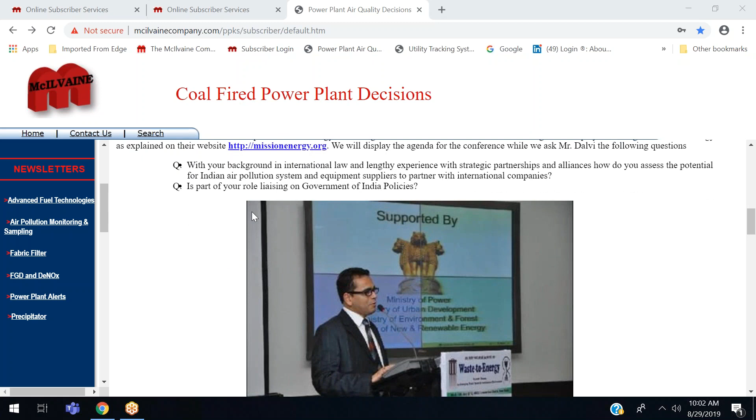I was just starting the introduction. I'm going to go to the answers to your questions in a minute, but you'll be the second speaker after Jerry Hunt. Okay, perfect. For the others on the line, this is Mr. Dalvi's picture here, and these are the questions that we're going to ask him.

Then we're going to be talking to Ravi Krishnan of Krishnan Associates about the Indian market. He was delayed—he was in Malaysia, trying to get back to his Mumbai office, but he may or may not be able to communicate because he may be on an airplane. In that case, I'm going to go through some of the market numbers for the Indian market. Joe Wang is on the conference with us, and he's a fountain of information about dry scrubbing—they are the largest dry scrubber manufacturer worldwide.

John Kirsch of NACE is going to summarize the program—a very impressive program they've undertaken to improve all the operations of their dry scrubbers at several different plants. Scott Affoldt will be making a presentation about predictive analytics tailored to dry scrubbing systems, which I think will be quite useful.

The consultants at Burns & McDonnell have provided some talking points, and we'll be pulling those up as well and discussing them. The Indian valve manufacturers are confident that they have all the valves to supply the Sox-NOx market in India—is there anybody from that group on the phone with us here?

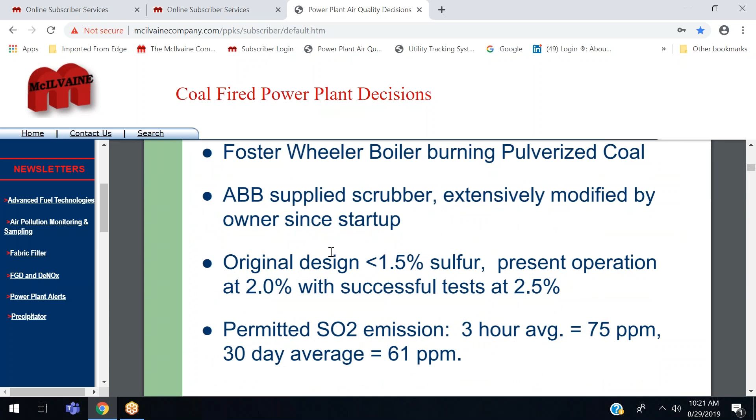Each of the days is going to have this quality of information to it, and in this particular case—I don't know if you can hear me, this is Paul Brandt with Burns McDonnell. I can speak a little bit, if John's not available, about some of his presentations and what they've looked at, just from a high level, that's maybe worth touching on for a minute.

Nobody achieves that, at least not in dry scrubbing. So whatever you are above that is costing you money on the reagent. I know they've continued to work through that.

They have employed dew point monitoring. One of the key parameters is your outlet temperature from your scrubber. Obviously, the lower you go, the better your reagent usage, but you don't want to go too low or you'll get into the corrosion realm downstream, which is something else John and his team have worked through in past discussions and presentations—really chasing, finding good materials, and finding that balance between improving your reagent utilization, using a dew point monitor to set your approach temperature above saturation, but not going too low and then creating a corrosion problem. I know Jerry can speak to that.

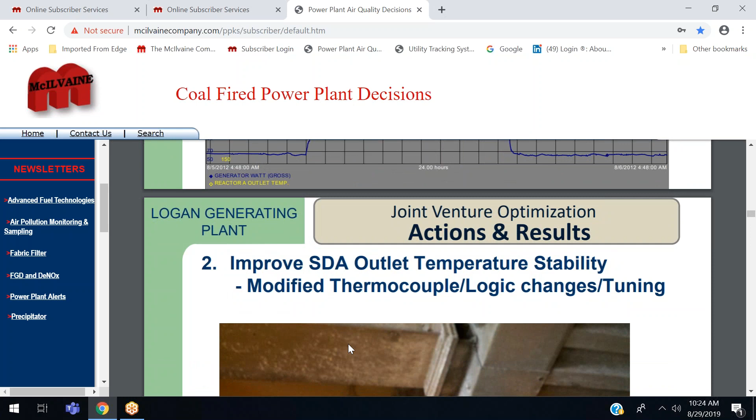I think they've also looked at different bags in their bag house—that may be later in the presentation. But yeah, those are two that John's really worked hard on with his team: the corrosion and the reagent utilization. So we definitely want to hear more about the bags too, and maybe we can learn a bit more about that for the meeting we could schedule next week on the bags and so forth.

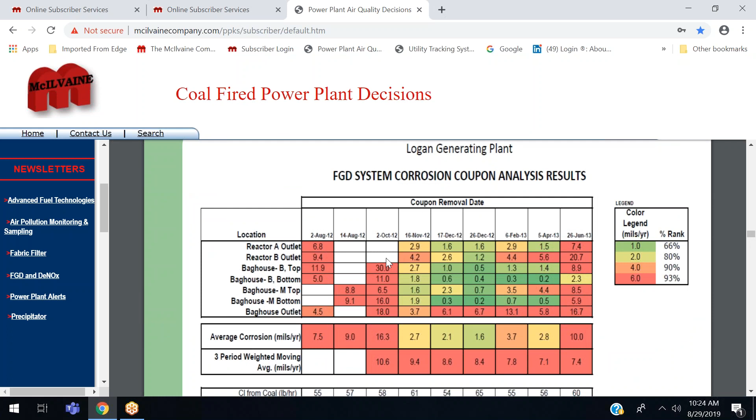But here, this presentation, by the way, is going to be available. I'll just ask one last query as to whether—Ross, would you have been able to unmute John there? I unmuted everybody, so anybody who was on should have been able to talk. So, oh okay, I guess maybe John was on earlier and we lost him somewhere along the way. I don't see him in the list of current attendees. Oh okay, no. So anyway, we appreciate his activity there. I think what we'll do then is move on.

I think, Mr. Dalvi, the best thing is to pull up the written answers that you provided, and then just have you verbalize with that in the background. How's that? Sounds good. In fact, I would like to answer them. If you can pull up, Bob, the program agenda which I sent this morning with the Sox-NOx conference.

A bit about Mission Energy Foundation. We are a non-profit organization, a group formed almost a decade back, 10 years back, by our Director General, Mr. Ashwin Kumar Khatri, under the aegis and blessings of the former President of India, Dr. APJ Abdul Kalam, also a renowned scientist, one of our beloved leaders here in India. So with Dr.

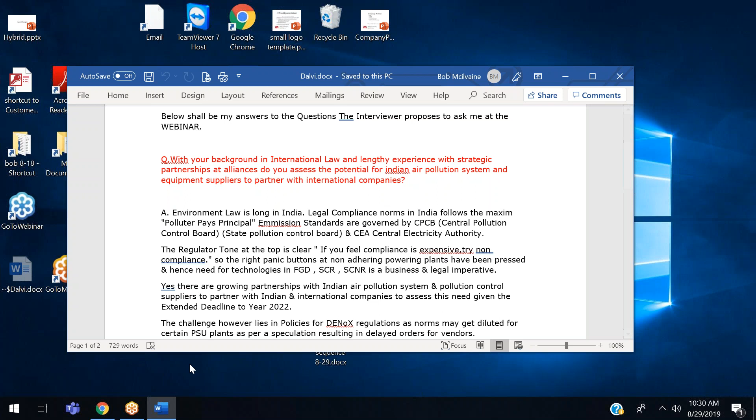Yes, Bob. And so as part of your role, liaisoning with government of India policies. Hey, Bob. Well, Bob, yes. Yes, please. Hello. Hey, Bob. Yes, Bob, I can hear you. Hi, Ravi. Please tell me.

I have a flight to board in about 20-25 minutes. I was just trying to see if I could finish part of my section, and maybe if you want me to jump in next week, I could do that. But I won't be able to share screens. I just wanted to see if I'm needed today, or I should try. No, why don't we just interrupt for a few minutes here, and please proceed. Okay, yes, Ravi, please.

Okay, great. So I just wanted to take the opportunity to introduce myself and give you a little background, and then hit on some highlights on the scrubber market, the FGD market in India. My name is Ravi Krishnan. I've been in the air pollution control business for about 20 plus years, primarily operating out of the United States, and have been involved in NOx and SOx projects, having worked on several of them.

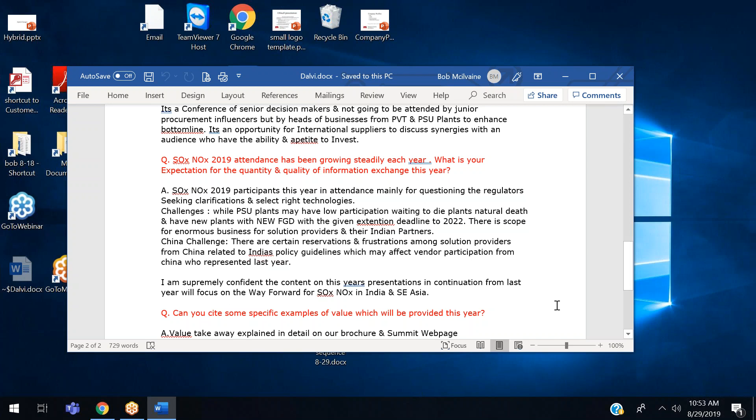So the value takeaway is explained in detail on a brochure and summit webpage. Of course, the link will be shared to all participants, which is Sox-NOx 2019.missionenergy.org. The second key value takeaway is the Government of India support from various ministries, which means the regulators would be present.

So I'm sure they'd be open to asking questions why the deadline has been extended to 2022, and what would be the effect, and what are the kind of compliances that they'd like to see.

We have Environment Excellence Awards in 10 categories, again explained on the brochure. The fourth, which is very close to my heart, is one-on-one meetings.

So this is not typically just a buyer and seller meet, but a policy conference. That's the reason why thermal power plants are expected to attend in large numbers, and we have such a great bit of contribution from the largest thermal power plant, that is NTPC in India.

And so these one-on-one meetings with sponsors and exhibitors at the exhibits with key participants during the day, and networking cocktails at the end of day one, is one of the key values. The post-conference report, this is what we with pride boast about, that Mission Energy Foundation.

Let me also bring in the second question. Is part of your role liaising with Government of India policies?

So here I would like to put the fact that we would be submitting a post-event report to varied ministries as a collective voice of the industry.

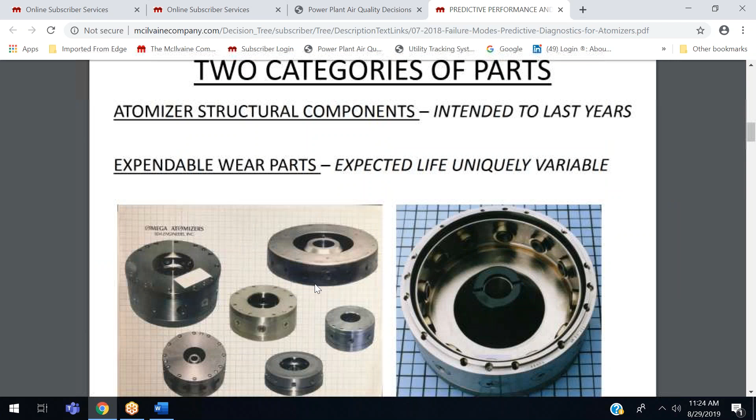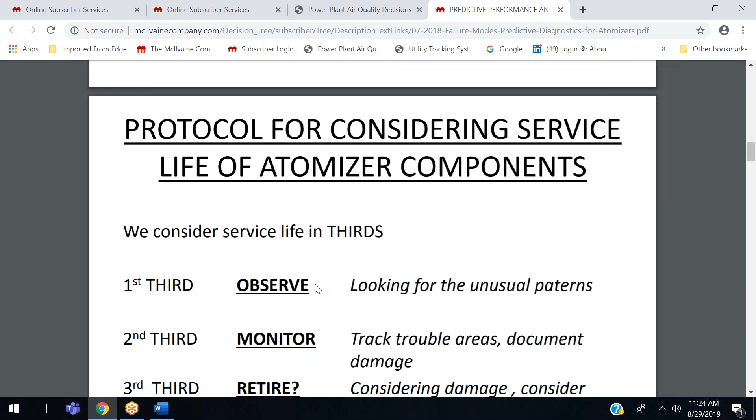But I do think they have done prognostics on a manual basis for atomizers. I think that leads us into Scott's paper, does it not, Scott? Because here's somebody with all sorts of problems with atomizers, and it has to be organized in such a way to lower the total cost of ownership. I think that's a good segue into Scott Alfeld's presentation.

Definitely. So, Bob, why don't you cue up the PowerPoint there, and I'll jump in. While we're getting that up, I'm going to talk a little bit about the opportunities for applying predictive analytics to air pollution control equipment. Predictive analytics have been used in a lot of rotating equipment for many years, things like turbines and what have you. But what I see happening in the future is applying some of these same predictive analytics solutions to air pollution control, both equipment and processes.

So Bob, go to the next slide. A little bit about Exemplar Energy. Myself and my business partner, Deepak Ajuria, represent Exemplar. We do some consulting. As far as technology liaison, a lot of discussion on India - we've done a lot of work in that market, specifically by liaisoning with Western technology companies to find local partners or technology transfer partners within India. It's a big growing market for pollution control technology, but it's important to have a local partner, and in many cases a local manufacturing capability, or else you'll never be able to compete with the prices. So we work with a lot of Western companies and find them local partners through licensing or technology transfer arrangements. That's a little relevant to some of the earlier discussion.

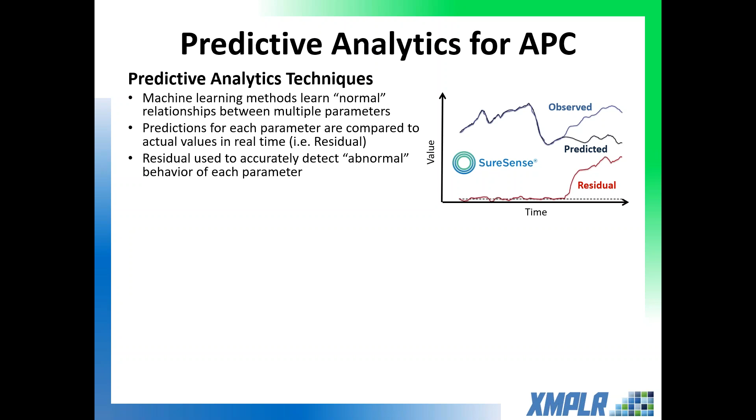Bob, click one more time while I'm talking. Predictive analytics for pollution control is really around using machine learning methods where we can learn the normal relationships between multiple parameters in the process or equipment, and then make predictions on what each of those parameters should be if that equipment or process is operating normally, and compare that to the actual values in real time. The difference between that observed value and the predicted value is called a residual, and that residual should be zero - it should have normal predictive properties. We can use that residual to very accurately detect any abnormal behavior in each of these parameters. Next click, Bob. The benefits for using predictive analytics for APC equipment really center around two areas.

The first area is around equipment reliability. There's a lot of equipment involved in the APC process, and these predictive analytics methods can detect very early on any pending equipment issues. The earlier we detect them, we can identify the cause, provide insights into the time to act, and correct the problem before there's any threshold impact on performance or a compliance violation.

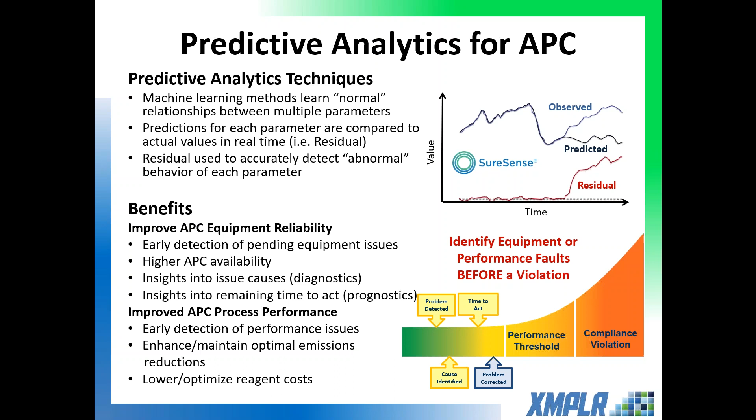The other area is using predictive analytics to monitor process performance. We're looking at the process variables, detecting very early on if those variables are normal or abnormal, which gives an indication of whether the process is working properly. This could allow us to enhance or maintain optimal emissions reductions, and also monitor and optimize or lower reagent costs so we're operating at the right molar level.

The main difference between predictive analytics and normal trend monitoring is that each parameter we're monitoring has a normal range of variation. For example, temperature could be higher at higher load and lower at lower load. But as we look at normal thresholds, we have to create threshold limits that can accommodate that normal process variation. So when temperature exceeds that threshold, that's an anomaly detection.

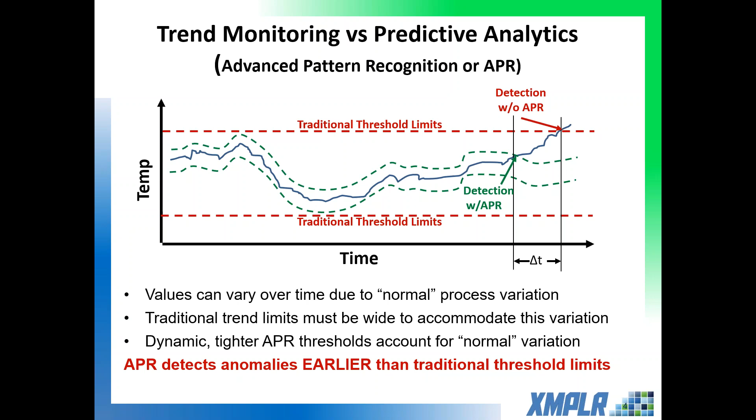Using predictive analytics, effectively what we're doing is putting those temperature parameters, or whatever parameters we're interested in, in the context of how it's being operated. That means we can create a dynamic threshold that takes into consideration how that particular asset is operating, allowing a much tighter threshold, and detecting any abnormality or anomaly much earlier than you could otherwise. The real value of predictive analytics is accurate detection and, most importantly, earlier detection.

Another important thing is that usually when monitoring trends, like in your PI system, you're looking at each individual parameter independently. In this case, your reagent flow may be normal and your temperature control may be normal. But if we look at the combination of these two parameters, even though each is within the acceptable operating threshold individually, the combination is not.

This is what pattern recognition and predictive analytics can do. It can look at not just two dimensions, but almost an infinite number of dimensions of different parameters, giving us the ability to identify relationships that are abnormal much earlier than otherwise. The software company we work with a lot is called Expert Microsystems, and their software solution is called SureSense.

Can you repeat? Yes, sorry to interrupt. Can you repeat the software company you work with? The company is called Expert Microsystems, it's on that slide in the lower right-hand corner, and the product itself is called SureSense. Right, thank you. All right, next slide, if you would.

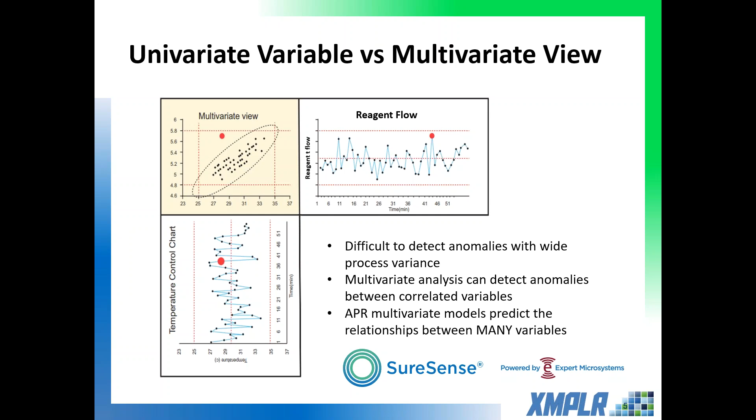In the context of using advanced pattern recognition, or APR, for dry scrubbers, one challenge is there are a lot of variables impacting the performance of the FGD process. Whether the unit is at full load, cycling, or low load, flue gas temperatures are continually changing. Ambient conditions can change dramatically. Coal properties and water quality used in the slurries all have a big impact on the quality and performance of the process. As a result, it's very difficult to predict what that performance should be.

With respect to using APR for dry scrubbers, there are really two areas where I envision we could take advantage of predictive analytics. One is monitoring all of the key equipment. We can use these predictive analytics methods to monitor the reliability of equipment, such as the reagent feeder system, water treatment, nozzles, or any other balance of plant equipment like pumps, motors, and valves. If this equipment fails, it impacts the performance, reliability, and availability of the dry scrubber system.

So we can use predictive analytics to monitor in real time and detect any kind of problems at the earliest point, so that they can be detected and repaired before they become a real problem.

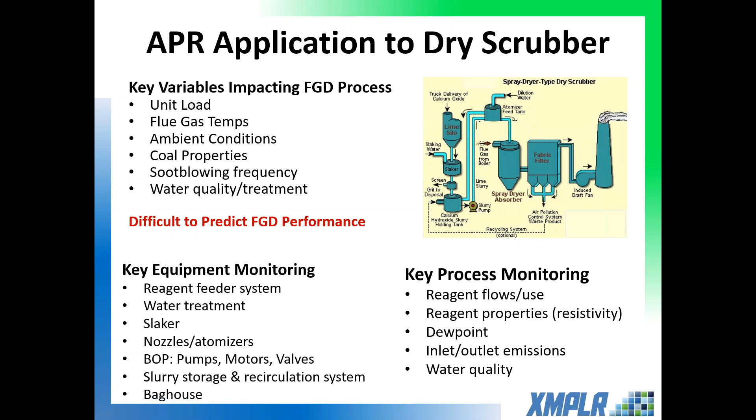If you go to the next slide, this is a specific example. But not only are we using the predictive analytics to detect these abnormalities, we can use the symptoms that we're monitoring, or the anomalies and the combinations of what those anomalies are telling us, to also automatically diagnose the problem. SureSense has the capability, it's called the virtual subject matter expert. So instead of relying on manual subject matter experts, we can capture and leverage and automate that expert knowledge, so that when the software sees the combination of different symptoms, we can provide some insights into what the likely cause would be, and that can be very beneficial with respect to the repair.

One more click, Bob. The last piece of the puzzle is, not only can we detect a problem and provide some insights into what the cause might be, but we can provide some context into the remaining time to act. How much time do I have before that piece of equipment or that process exceeds some limit? That can be helpful for planning the maintenance around that. Perhaps I can make it till the next outage that's in 3 weeks away or 1 month away. And this is all based on the degradation rate of the symptoms that we're monitoring.

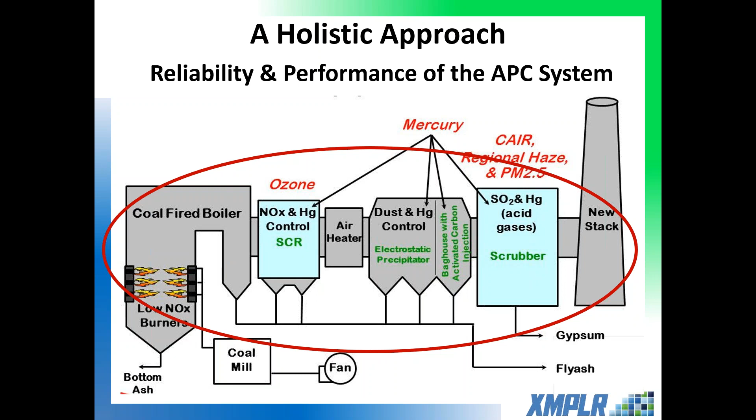All right, just to conclude here. My feeling is we can use predictive analytics to not only detect anomalies in the APC equipment with respect to reliability and performance, but before they can impact compliance. These kinds of methods are very sensitive and accurate, and typically find problems before things trigger in the DCS system, as an example. This gives operators time to repair or correct the problem before it becomes a compliance issue.

This concept of a virtual subject matter expert - I know Bob's a big advocate of capturing the wisdom of the IoT. Here's an opportunity where we can capture this knowledge and embed it into these solutions that we can then automate, some of the diagnostics based on the monitoring of multiple symptoms.

This will allow us to much more cost effectively and more quickly identify what the problem is. And the last piece is providing some time context. How much longer do I have? Whether you have a week, an hour, or a month, that information can be very helpful for your operator to know exactly how much of a priority it is.

That allows you to better plan any kind of maintenance, and instead of having to expedite parts or crews to do the maintenance, you can plan around that if you know you've got a longer time before there's a problem. And the bottom line is, by combining these kinds of predictive analytics, we can really increase the pollution control availability of these plants, because if they're restricted from a compliance standpoint, if the scrubber goes down, the plant can't operate, and we don't want that to happen.

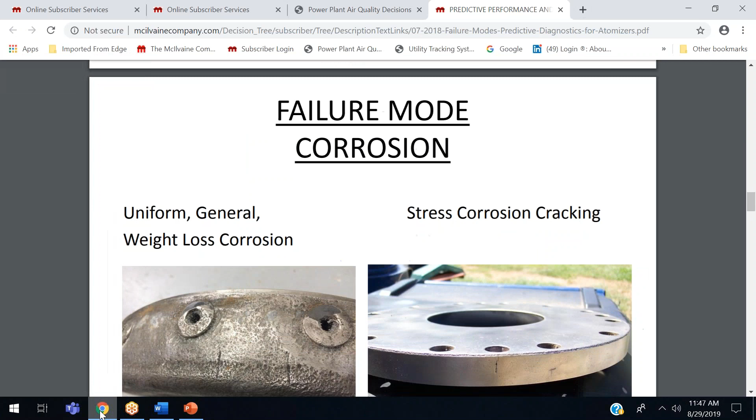Deepak, I have a question for you pertaining to the India market. For example, leaders like BHEL - there has been a recent change in top management, with Mr. Atul Sobti, chairman of BHEL, retiring, and Mr. Nalin Singhal now the new chairman. So have there been hiccups or pitfalls with top management changes and decision making?

I don't think so. BHEL, obviously, is a government organization. They have decisions by committees, so there's no single individual who takes a decision. Basically everything moves slow in that system. What we find is that as long as they are convinced it meets their purpose - the chairman is one of the top signatories, he has to say yes, but he is not a roadblock. This gentleman, the new chairman, is a nice gentleman, Dr. Nalin Singhal. He comes with plenty of PSU experience, he's not someone from government who has never worked in industry. He was chairman of ISPTC before that, and I think he worked in CEL also, and he knows quite a lot of things, he knows how to run companies. So I'm sure it won't impact anything.